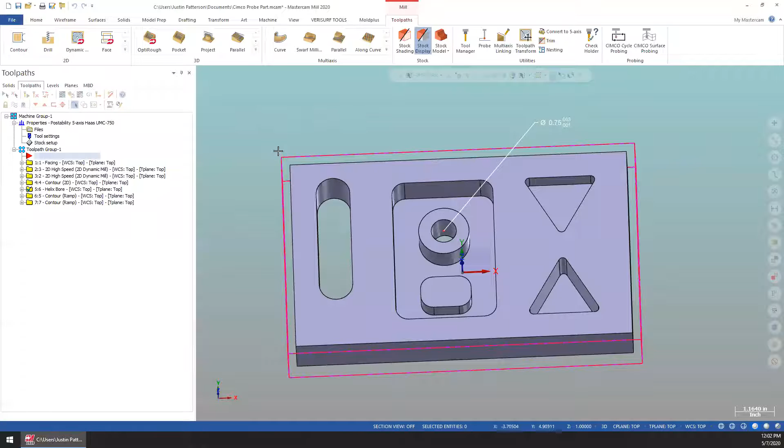It's just a simple part. It's actually out of our 2D training. I just figured this would be something good. I've thrown just a couple toolpaths on it to get us to where we can work on the if-then statements. But the first thing we want to do is, this is running on, let's say, a Haas UMC 750. We want to make sure that the part is square to the world, meaning C-axis and B-axis in this case. So all the probing just runs through these two.

I'm not going to be going over the surface probing. That will be a separate webinar. Also in the future, we're going to work on a webinar based on probing on the lathe, but right now we're just focusing on standard probing cycles for a mill. These can be added to whatever tool tab you want, so it's not required to be here in the mill. You can put it wherever you want.

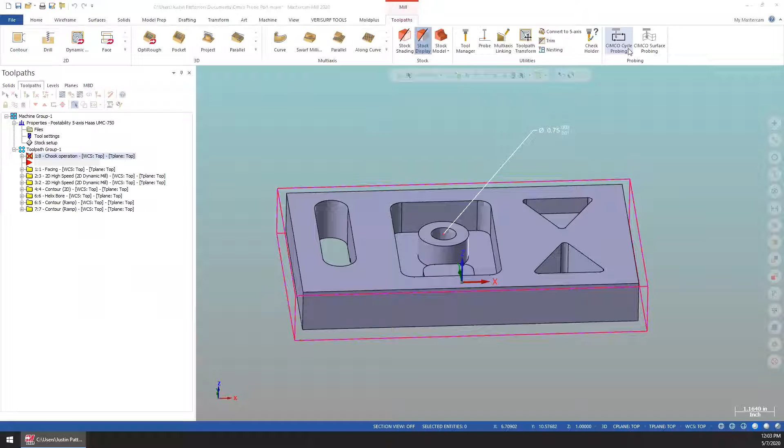Inside of here, we have our 3 different categories. We have workpiece alignment, workpiece datum, and workpiece inspection. So for our alignment, let's say we want to clock C-axis. Make sure C-axis is clocked correctly. Okay, so I'm going to go into the workpiece angle, and it takes a second for it to load up. It is doing a C-hook in the background, but it will load.

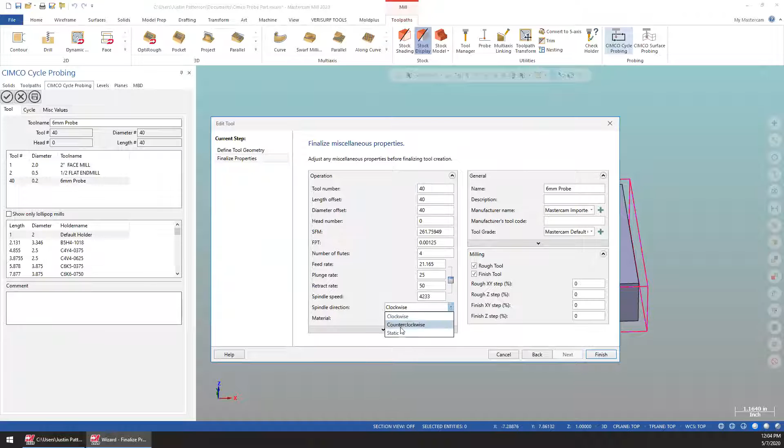I've already created a probe. All you need on a probe is just for it to be a lollipop tool. That's it. I just made this a 6mm probe. And the other thing we want to make sure is that it's a static probe, meaning it will not turn the spindle on, okay? So from there, we go into our actual cycle. This is where we add our geometry.

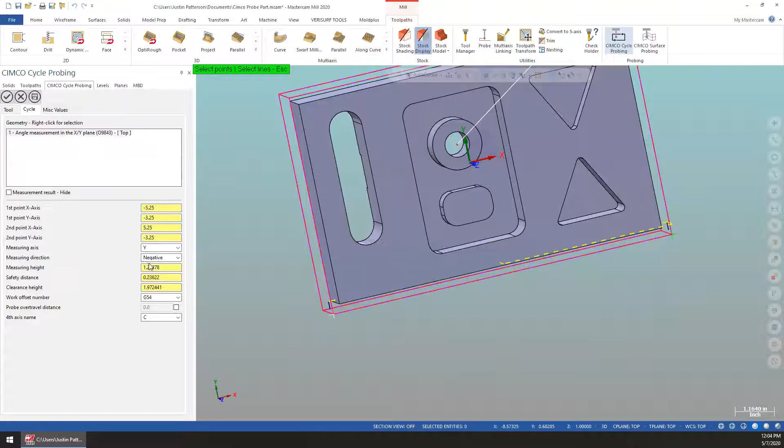If I right-click in here, I can set points. For this, since I'm going to align C-axis, I just want to click 2 points on the front face. Either face will work. I'm going to select points, and select the corners of my stock, just here and here. And it automatically outputs like this. This actually flipped the wrong way, but it's simple. The measure direction is set to negative and it needs to be positive.

So where the hits are represented in the yellow, everything can be changed. If you look through all of this process we're doing, you'll see all these variables can be changed. So the first point in X, do you want to move it? The first point in Y, do you want to move it? So if I simply hover my mouse and click, I can wheel to change these values.

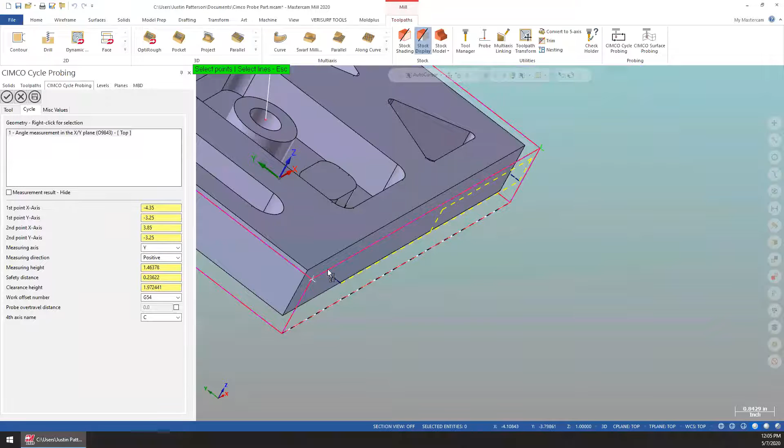So if I don't like where that X was hitting on the first hit and the second hit, I can simply wheel them in. Same thing with the measuring height, which is how deep in the part we're measuring. I can just simply wheel that. And then you have the safety distance, which is what's represented by the blue. This is going to go throughout all the processes, so I don't have to re-explain all that. I can make my safety distance larger or smaller. And then my clearance height, which is the overall height, how high do I want to go?

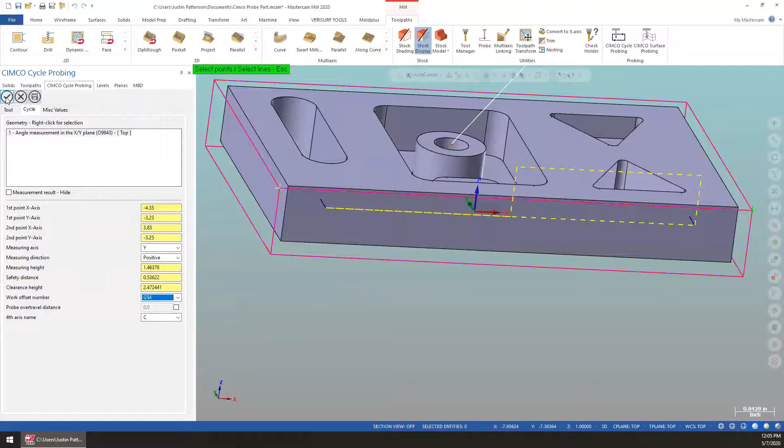So then I say, well, what offset am I going to update? Well, in this case, G54. And the axis I'm trying to update is the C-axis for the rotation. So I go ahead and hit that. It actually builds my probe routine right there. So I can replay this just like anything else. I come and take a hit. I come and take a hit.

It'll actually do the work in the background and do the work offset for C to align this part. Same thing with a B. In this case, with a UMC, this is going to be a B. We're going to go to workpiece alignment, and I'm going to do it via X-axis.

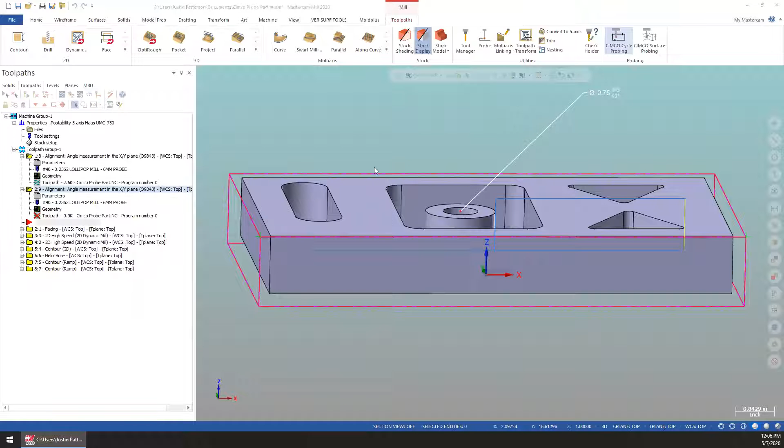I always get these backwards. If one doesn't work, try another one. That's what I always say.

So again, let it load up. I picked my probe. I go to my cycle, same thing. I'm going to select 2 points. I'm going to select the same 2 points I just used because I can move them. They're going to be in Z now because it's going to come and hit and make sure B is rotated correctly. So here I can simply, again, come in and move where I want Y to be.

Do I want Y to be more in? Do I want my X point to be in? So on and so forth. If you don't want to do this, you can go in there and physically put points through Mastercam wireframe of where you want those hits to take place. But I found it so much easier just to come in and move this around. And the axis we are going to change is going to be axis B.

Same thing. I can change the measuring height and all that stuff. Hit green check. So the nice thing about this is I've now come in here and I've aligned C axis. I've made sure B axis is correct. Now this is not always required. It's just I want you guys to know that this is something you can do. But now when it comes to actually aligning the part, I come in here and we're going to start working out of the workpiece datum section.

Okay. So the first thing we need to do is establish Z axis. I have my axis for this part, the bottom center of the stock. I've created the stock boundary already with wireframe. And I go ahead and put wireframe on the part for when we get into the inspection side of things because it needs to read wireframe.

But anyways, I'm going to go back to my workpiece datum and I'm going to go do a 1 point axis. And what I like about this is it's giving me the macros on the machine that it's pulling this from. So O9811 is the one it's going to pull on the machine. This will list all those out based on what machine you're using.

You have options. The other thing you notice, you could be pre-active or post-active with this, is what I call it. I could make these changes before because if you notice it's coming in X, I want it to come in Z. That's it. And then negative and positive obviously would just come from the opposite direction, okay? So again, this is where we're hitting. This is my safety distance and this is my clearance height. What offset am I updating? It's just that simple. That's all we need to do to update Z.

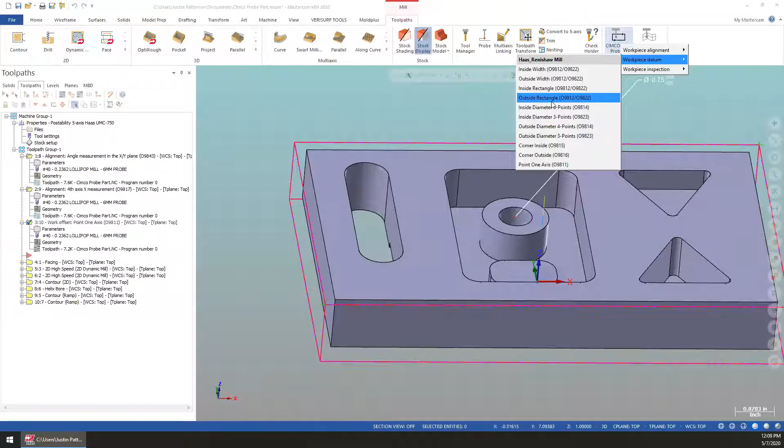And then as it comes to update X and Y, we have a couple ways we can do this. One of which is just simply doing a corner where I could go back and I could just check this corner, or we can do a full-blown rectangle. So if I come in here, I can actually say, I want to do an outside rectangle and it'll check all 4 sides. Or like I said, we could do a corner. We'll do 2 points on this corner, 2 points on this corner. 100 ways we can do this.

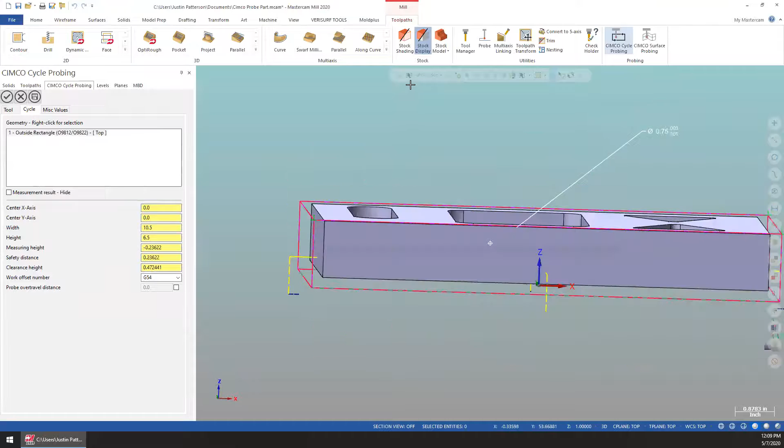So again, I can come in here. What's nice when I do a rectangle, it says, do you want me to go ahead and pull it from the stock, or I can pick lines, or I can select a chain. For this, I'm just going to have it pick the stock. Now, it didn't do a very good job at finding the depths, but it did find all the hits on the stock itself.

So again, all I need to do is come in here and wheel this up to where I want, or I can hand key in a dimension, or your right click options that we're used to in Mastercam still are there. So you could do a distance between 2 points, a Z axis, whatever you want. Safety distance, and then again, my clearance height. And here we're gonna say, what offset are we hitting?

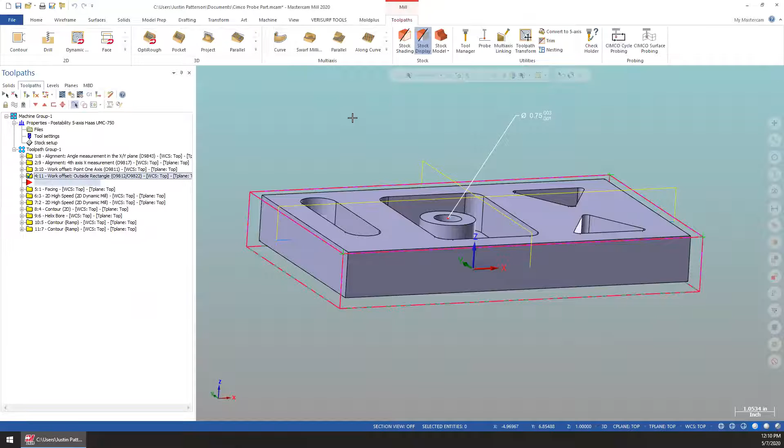Well, we're hitting that offset. So we've done that so far. I mean, you can see how quick we've thrown all this together to simply align this part. So now everything's been aligned. We're rocking and rolling. We go in here and we face the part. We do some 2D high-speed stuff.

We get to this helix bore right here. We bore this hole out, and I threw this tolerance on here just to throw it on there. Let's say it was 3/4 plus 3 minus 1. So with this, I want to go in there and I want to probe this hole to create an if-then statement to where, right after I get done boring this, go in there and probe this. Let's make sure this hole's falling within tolerance.

So when we go into that, we're going to go now into a workpiece inspection. Anything that's not aligning the part is part of the workpiece inspection section of the probing. So I have 2 options. I can do an inside diameter 4-point or an inside diameter 3-point. It's just how many hits do you want to take. Notice they pull different macros to do that. I'm just going to grab the inside diameter 3-point here. And again, let it load.

And there we go. My probe is there. And this is just a standard tool. I might as well throw this in there. You go in there, it's in your tool library. Whatever you keep your tool in your magazine, just leave it in the tool library like that and pull it in every time.

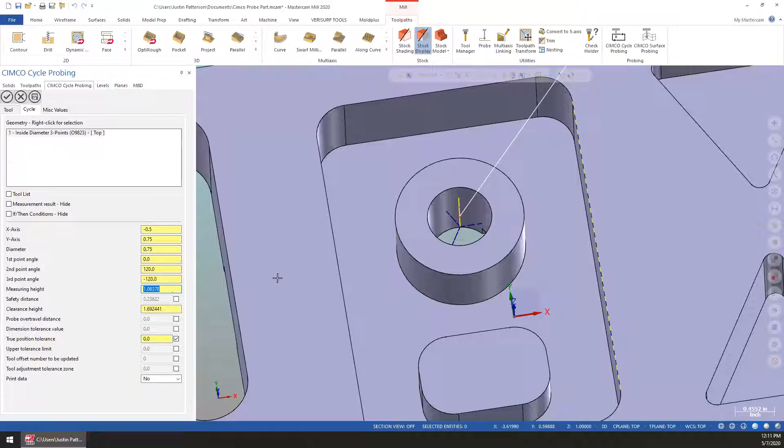So inside of here, I only have one option. I have select an arc. So simply just select your arc, and it's pretty good at building this where we want to hit at. Again, I can change the X and Y, but now it's going to change from where I have selected, so I probably don't want to mess with that. I can also change the height that I'm hitting it at if I don't want to go that deep into the hole. And we also have first, second, and third point angles, which are these. There's first, second, and third. We'll utilize that when we check this radius here, how we can change that. But normally leaving it here for checking a hole is what we want.

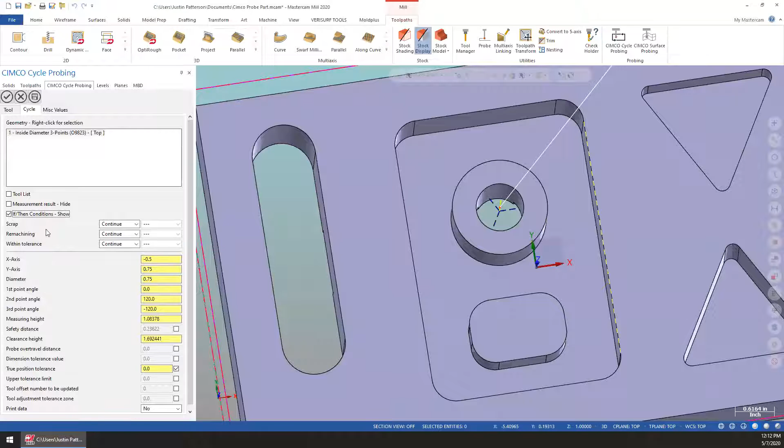So we're going to go in here and we're going to create what's called an if-then condition. So right here, I'm going to check if-then condition. So there's three possible options this hole could be. This hole could be over the allowable tolerance. It can be below the allowable tolerance, need to be remachined into tolerance, or it can be within tolerance. So I'm just going to start at the bottom with within tolerance. If it's within my 750 plus 3 minus 1, then I want you to go ahead and just continue on your merry way and go to the next toolpath, okay?

Let's go to scrap real quick. Obviously, if it's over what I tell it, what do I want you to do? I want you to go to the end of the program because there's no need for you to run anything else. I don't need to waste any more machine time if this hole's blown out. So it's just as simple as saying that.

So now let's look at the remachining side of things. We're going to tell it that if it needs remachining, I want you to go to a certain operation. So I'm going to select this because what is the operation that did this hole? Pretty much what it's asking is it's going to check it, says it's undersized, and I'm going to get to how it defines undersized. It's going to say, all right, well, it's undersized 3 thousandths, whatever. It's going to put 3 thousandths worth of comp into the tool I tell it to that drives this hole and go back to the operation I tell it to, which in this case would be operation 9.

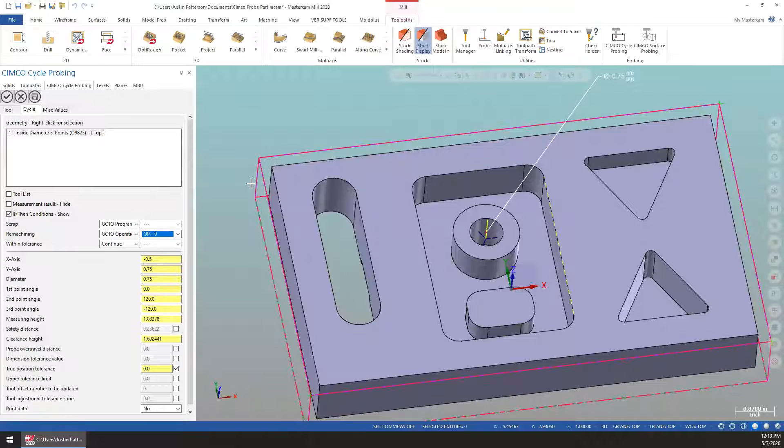Okay, so I want it to go back to operation 9 and rerun 9. So it adds the comp, bores the hole, and it's going to come right back and probe the hole again. And hopefully it should be within tolerance, so it goes out and continues on.

So how does it know what's tolerance and what's not? Well, we have to do a little bit of math for this. In an instance like this, 750 plus 3 minus 1, we've got to find the true middle nominal. So in this case it would be 751 plus or minus 2. So that's how they want to read that. They want to know what the tolerance is. And if you question this, the one we're working about is the dimensional tolerance value. If I enable this and hover my mouse over this, they're pretty good at giving this example.

So for the dimension 1.968 plus 16 minus 0, the nominal tolerance is 1.976 with an H value of 8 thousandths. So that's saying that the hole should be 751 in our case, the top of the tolerance would be 753, and the bottom of the tolerance would be 749. So anything over 753 is considered scrap.

Anything below 749 needs to be remachined, and they'll comp the value out to your nominal, which we're putting into our diameter right here. So it'd be 751. That's what it's striving to hit, that exact nominal. So all I do is put in that nominal value that I had to figure from here, and then my dimensional tolerance, which in this case would be 2 thousandths.

The only other thing we need to do is tell it what tool we want to update. So the tool offset number to be updated in this case would be number 2, because that's what my end mill is. That's literally all we do. So if it's scrap, go to the end of the program. If it's within tolerance, continue. If it's not, add the appropriate amount of comp to the tool, rerun operation 9, reprobe it, and continue on from there. So green check.

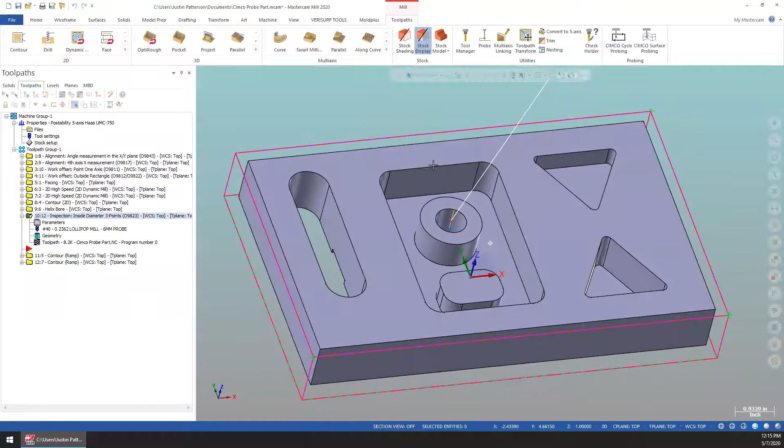So it's built it in, and I will show you when we post the code how it does the return statements. It's kind of neat. They built that all in for you. So again, all this you can replay however you want, and you can edit these operations. So once we've done all this, we have the opportunity to start inspecting parts after everything's done.

So all our options again are in our workpiece inspection. We can do an inside width, outside, so on and so forth. We can check holes. So let's go ahead and check this pocket here. That's just going to be an inside rectangle. Okay. Again, pick your probe. And here I can select lines. I could select these 4 lines, or I could simply select a chain. Just like typical Mastercam, come in and select your chain. There we go.

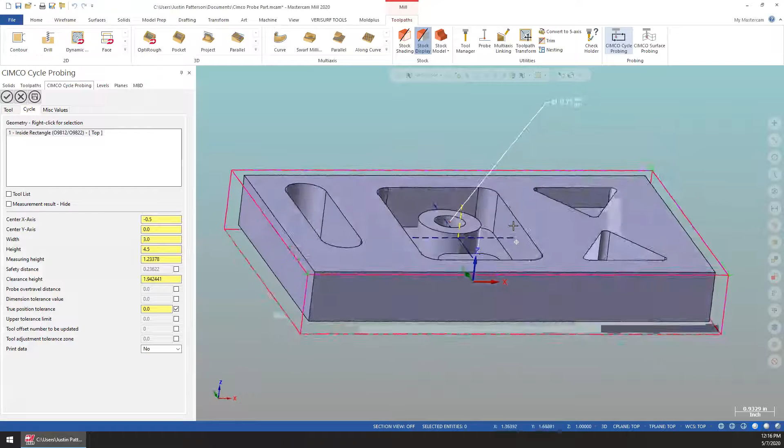So again, it does an okay job. It doesn't know that this is in the center here. It has no idea that that's there. So we need to give it a safety distance, because if we remove safety, it comes down here and hits, which is fine if these bosses did not reside in there, but they do. So I can make these a little bit less, a little bit more. I can change my clearance height. I can also change my measuring height, as we've already discussed.

So for here, I need it to show me the measurement results. The measurement results all print out to a variable on the machine. So here I can do set point C, center X axis, and so forth. You can see all these. The ones that I think are nice are actual width, actual height, or you can have it tell you the deviation in the width and the deviation in the height, so you know an actual value of how far the width is off of nominal.

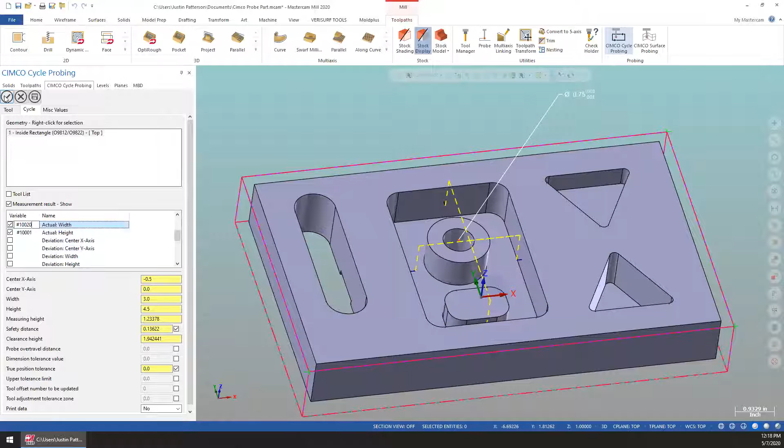So let's say in this case we wanted to post out actual width and actual height. This tells us what variables they're going in. They automatically go in 1 increments. You can input your own variable. If you have a set variable you want it to go in, let's say 10,020, you can change these to whatever variable you want. So green check that. It's just going to inspect that center pocket and output that to the variable you've defined on the machine.

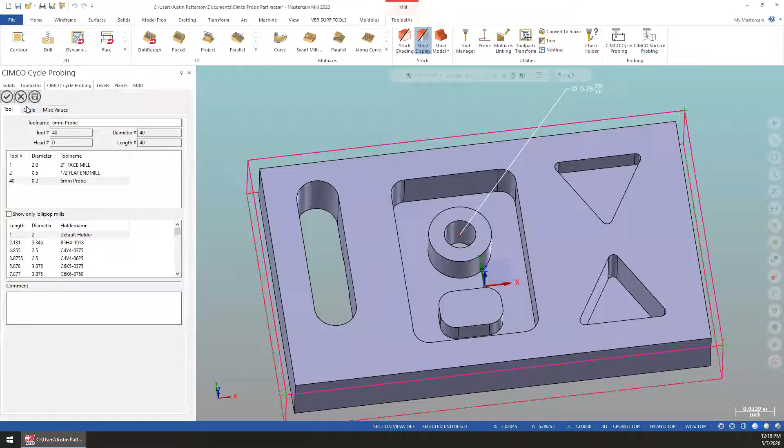So it would be the same thing if we went into the slot; we would just say an inside width. And for this case, we would just require 2 lines. Let it pull up, probe, select lines. I would simply select this line and this line, and there you go. It takes my 2 hits. And again, make the movements where you want. I can have it output my measurement, actual width, out of tolerance flag, so on and so forth. So I would green check.

There we go. So what I wanted to show you real quick is a couple more things, and then we'll open up for some questions. But let's say you wanted to check this radius here.

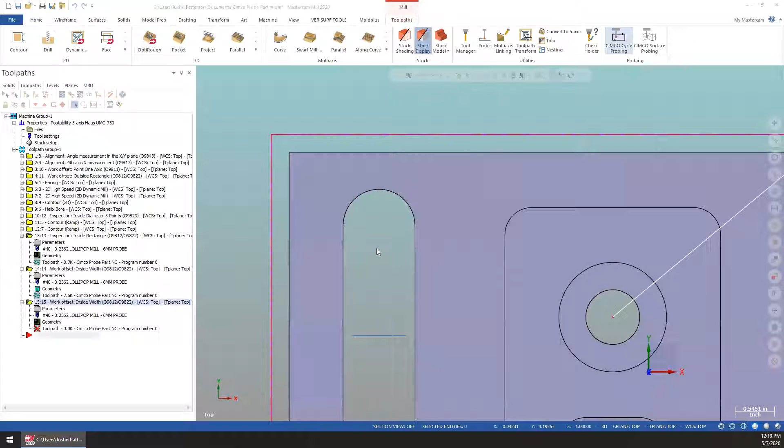Granted, if you measure this width, you got a pretty good idea what that radius is, but just for this, I'm going to show you how to do this. We can go in here and we can say an inside diameter, let's say 3 points. You can get very creative on this. So if it ever loads up, there we go. Cycle, select my arcs. I'm going to select this arc right here.

Now, if you look how it does its probe hits, remember it's this 0, 120, and a minus 120. Well, I can change those. So prime example is my first hit, I don't necessarily want it to be at 0. I want it to be maybe 20 degrees up. So again, you can wheel it, but as you can see, it's going in hundreds of thousands. So just type in 20.

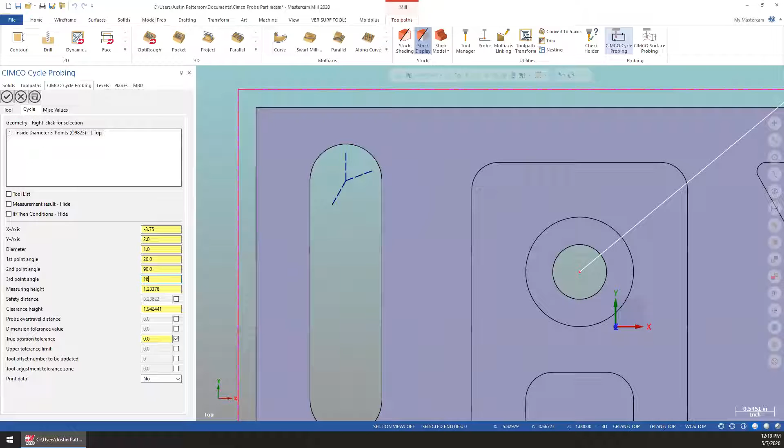There's my first. Well, then my second would be this. Instead of 120, let's make it 90. And then my third angle, instead of a minus 120, let's make it minus 160. Right there. So we can define these angles that it comes in and hits these radiuses at. So it will, again, measure result.

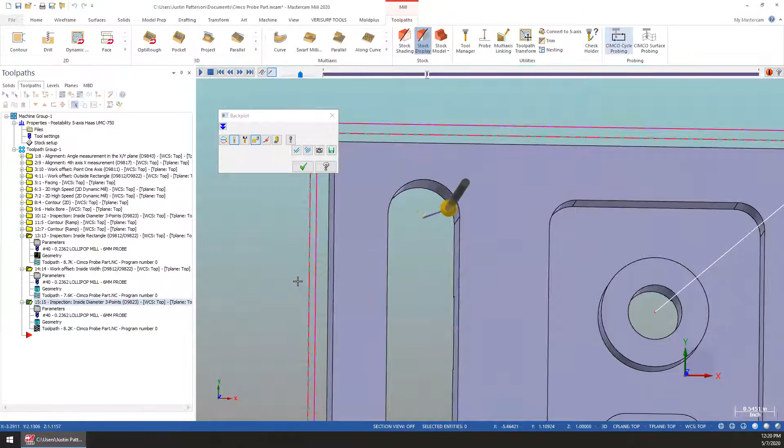The only thing is it will not output it as a radius, it will output it as a diameter. So remember that when you run to check this on the machine, it's going to be a diameter. But I can really define these probe hits really nice.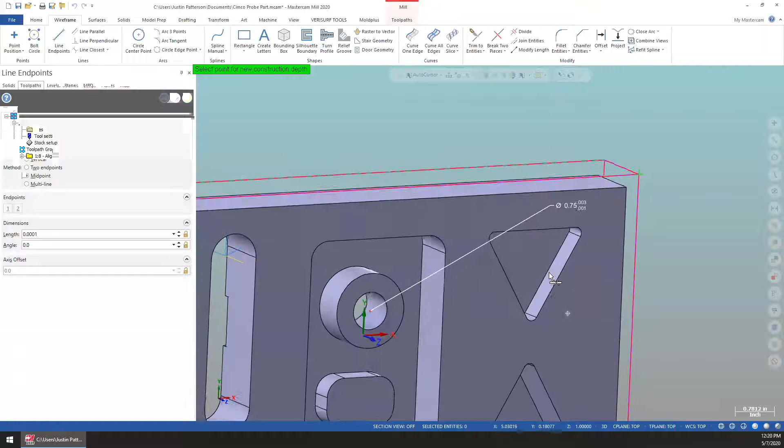One other thing I'd like to do, let's just say you need to know what the angle of this is. Well, this one you have to be a little proactive on. We need to draw a piece of geometry, a piece of wireframe on here. So I'm going to do a midpoint, and I'm going to go to this top here because I can drive everything else Z depth a little bit easier. And I'm going to come and draw a line that's just that long. Let's make it 1.25. Let's see where that puts us, somewhere around in there, okay? That puts us at that 60-degree angle because I need 2 points to set this at.

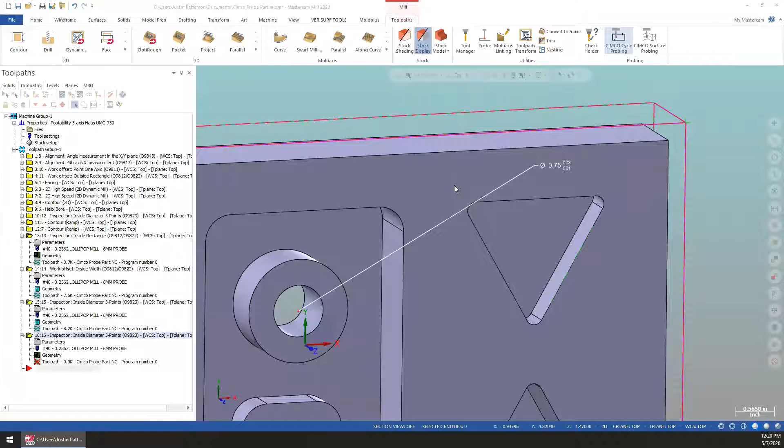So inside my toolpath, I'm going to come to workpiece inspection, and I'm going to do an angle measurement in the XY plane. It's like how we located C-axis, how we clocked C-axis. It's the same thing, but we're using it now to check an angle. So coming in here, I'm simply just going to select 2 points, this point and this point. And again, it's what side are we on, negative or positive? You just got to kind of pay attention.

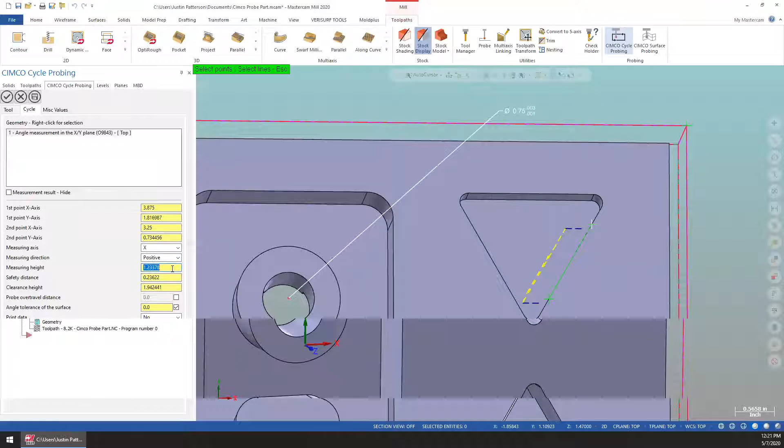Now, it does not do a straight in move. It still looks at everything in an X and Y fashion. But I can come in here and say, move this, not that one, I'm sorry, this one here, my safety distance in. And it's not nearly as a problem. So I can come in here and say, give me the actual angle of this line. And now when that probe comes in here to hit, it'll come in, make its hit, and will report that angle for that surface.

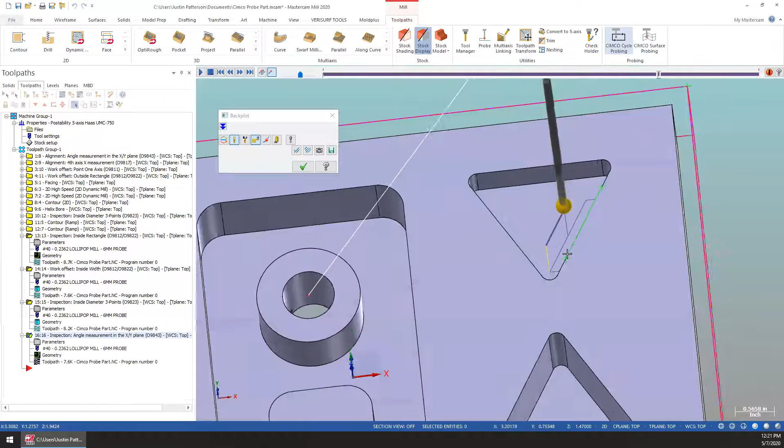So that's kind of a quick little rundown. You can kind of use your imagination of the things you can actually do. One other thing you could do is, let's say you want to know where the Z depth is of this floor. Just come in and do a 1 point, like how we set our Z axis. It's really your imagination, whatever you want this to be, okay?

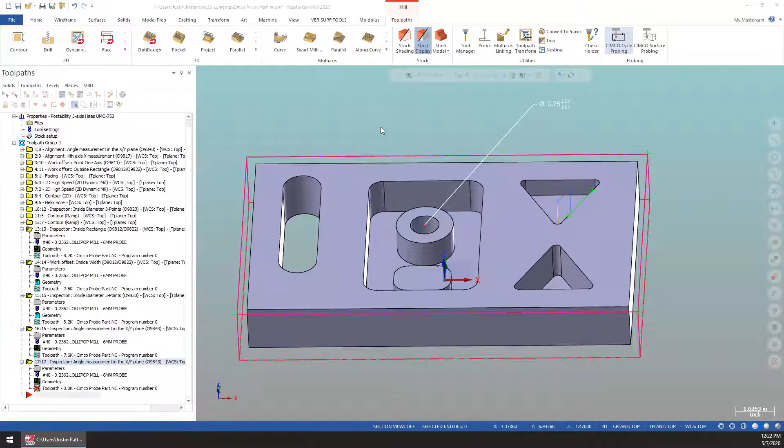Justin, what do you see as the primary uses for this? Well, personally, I think the two primary uses are the workpiece alignment and the in-process probing to make sure stuff is within tolerance. I think a lot of people are doing tighter tolerance features where we can do the if-then statements. I think that's the most powerful, but mainly I do think the workpiece alignment is the best.

Can you also do something like, let's say you're on a second op, to make sure that the proper piece was loaded? Yeah, correct. So that would be part of your if-then statement as well. You could go in there and take a hit of a feature and say that if it falls within this dimension of that feature, then go ahead and you're allowed to continue on. If it doesn't see that, then you are scrap.

And you could put anything in there. You can tell it to go to an M0 just to stop right there. That way the operator knows, anything like that. Yeah, you can use it for just that exact same thing.

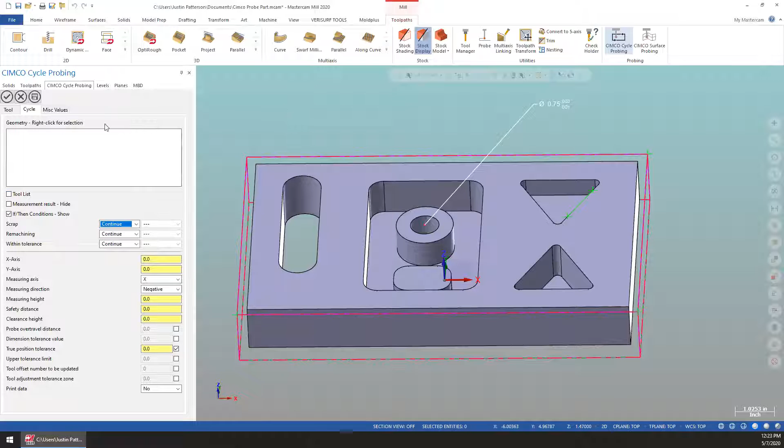But to go back to this, just your simple Z depth is I can come in here and hit a point right here. And again, I just need to tell it that it's a Z move. And I can change the Y to come out here maybe a little bit more. And then again, what's nice is I can right click and I can do the Z coordinates of a point, and I can pick a point there and it now changes that's my Z depth, pulling everything from Mastercam.

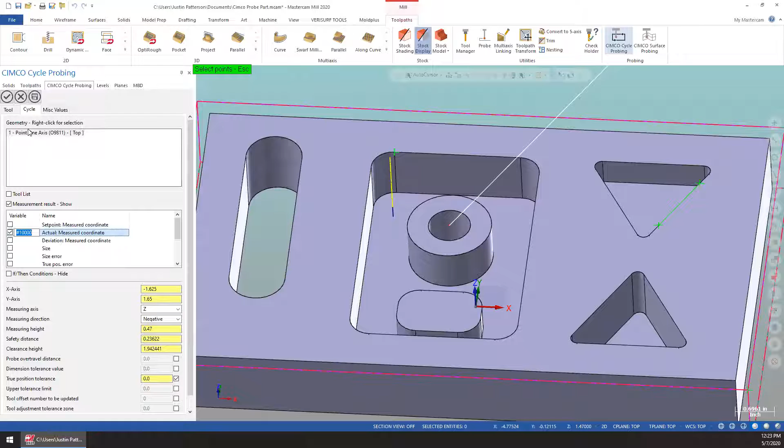So this would be the same thing. I would go in there and I could report the true position of this, the actual measured coordinates of that. So it will output an X and Y, but in this case, I just want it to be Z is what it'll output. So again, it's resetting the variables. So you kind of need to keep track of what variable number you're on. But I mean, we get paid a good salary to know these things. So we'll green check that.

So I did want to show you real quick kind of how the post will look. Again, this drives everything through the post. Yeah, so this one in particular doesn't like to have the S0, which is, you're going to get this for each one of these. When you buy this and you have your post work done on this, we'll have that changed. We actually ran into that at a customer. I hit cancel on that one, but oh well. Let's pull this over here.

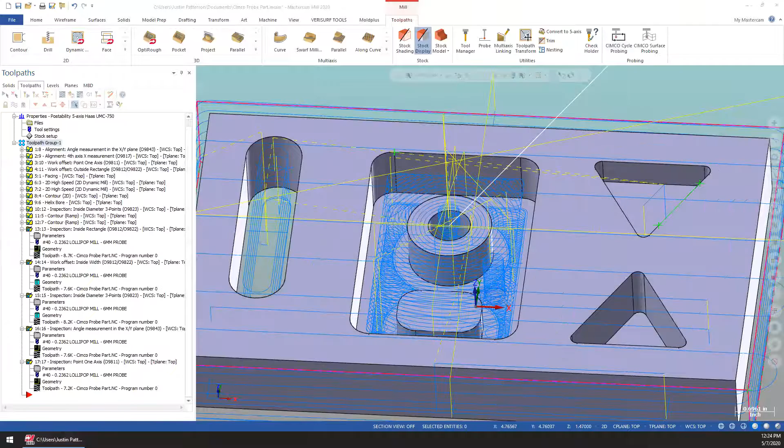So as you can see, the beginning cycles, it outputs all the probe routines throughout the process of the program. Instead of outputting everything as a sub-program at the beginning, it's in process. So as you can see, we go through here. Let me go through my tool changes. Let's look all the way down there at the bottom. Go up here to the top, click here, next tool, next tool. So you'll see when that probe comes in after this flat end mill, here it is.

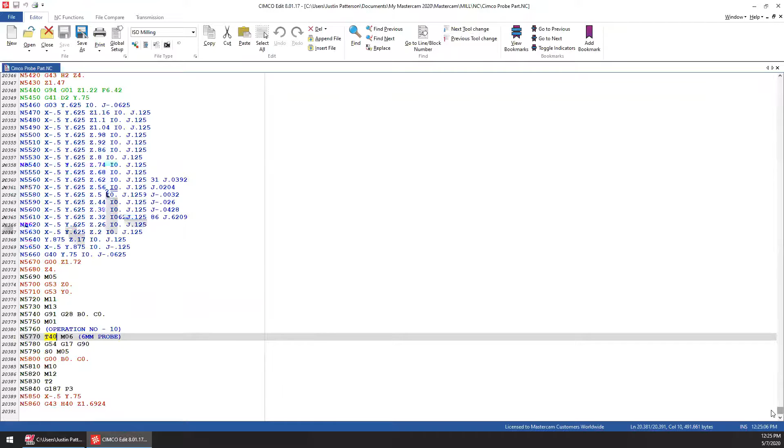This is where we, let's see, tool 2. That's when we did the hole. Well, that's the very end, isn't it? Yep, 6mm probe. Let me go back up here. Sorry, I got to find my helix bore. Tool 2. That's not posted out. I just posted out before this. That's how it always works. When you don't want something to work, it's not going to work. So I just want to show you these two here. Post these.

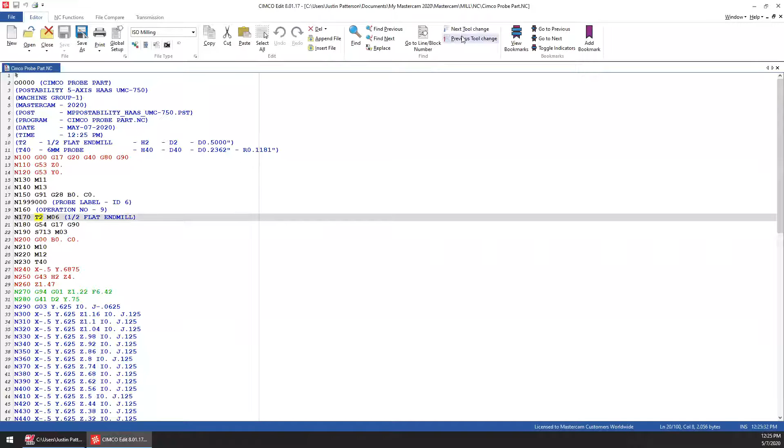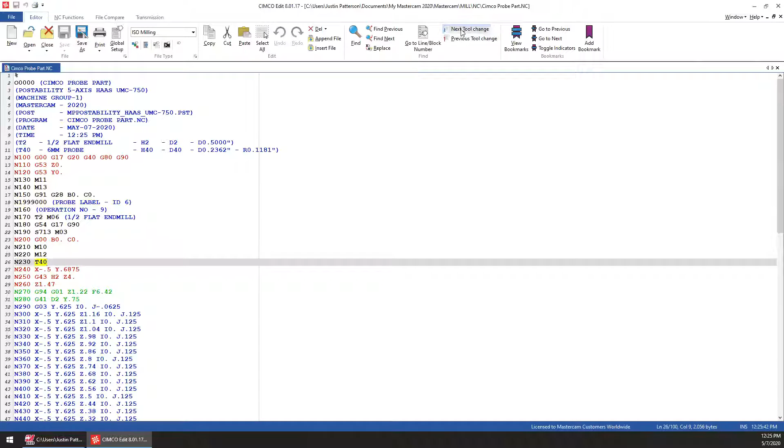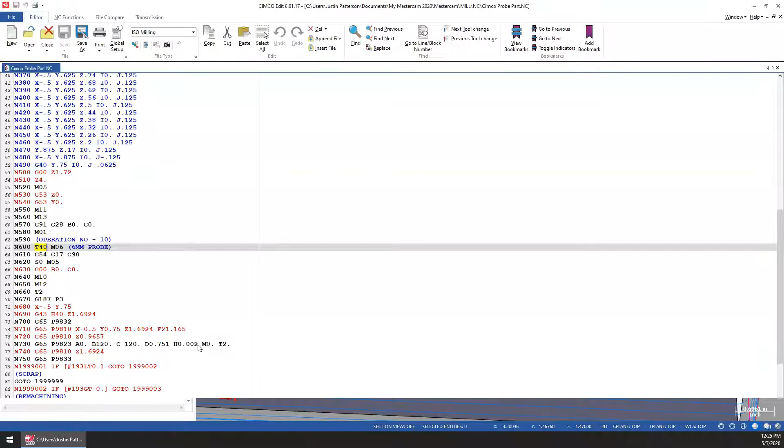Okay. Here we go. So there's your bore cycle. And then if you notice what it did is it inserts this probe label automatically, 1999000. And then you can see the probe come up here and it gives you the if then statements. It's telling you right here, see, here it is. So there's the diameter supposed to be 751 with our tolerance of 0.002. We're going to update tool 2.

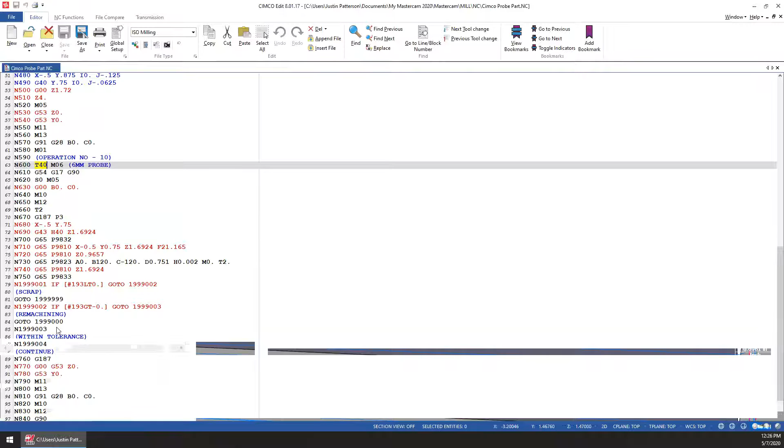So if it's scrap, go to 1999, which is at the end of the program. If it's within tolerance, go ahead and continue on. And if it's remachine, go to 19990, which is what we witnessed up here. So it builds all that into the post for you. So it makes it really nice and pretty seamless.

So I don't know if you guys have any more questions. Is there anything you need to ask? Nobody? Okay. Well, did you guys get hopefully all the information you need, kind of to show you how this would work?

The implementation, I will say on this, we've been pretty successful on several different instances to where it's not a very complicated install. It's simply just getting the post logic added to your post, and then you buy the license. Every install comes with, let me pull this down here, documentation. So what's nice is they do have tutorials built in. So if I go to the Renishaw, they give you a getting started to where you can actually walk through this.

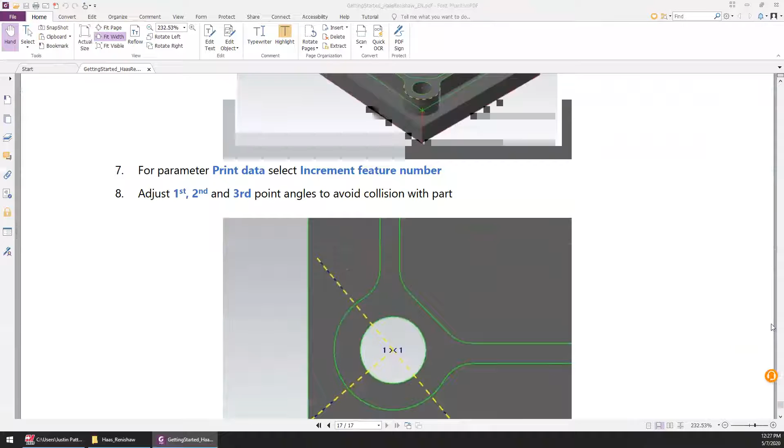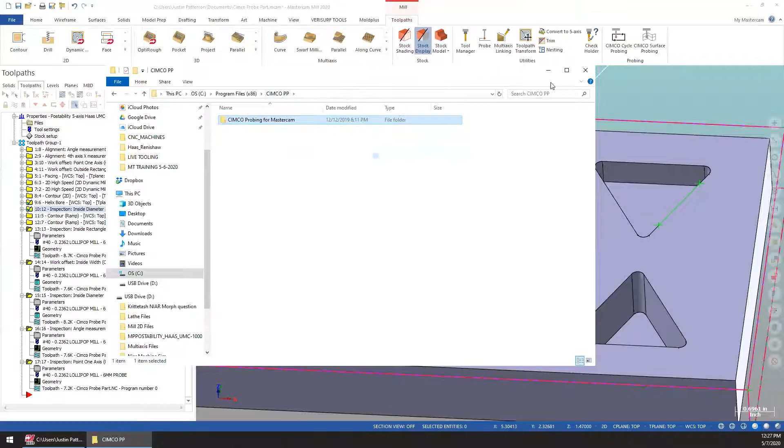It gives you, I don't know what that is. It actually walks through these same kind of processes we did, along with a sample part and a sample post. We have this for the Haas, a Fanuc, a Heidenhain, and a Siemens. It's pretty simple to figure out. Like I said, I will get into a further webinar on more surface probing. It'll actually come in and take several hits on a surface, but that'll be a future webinar.

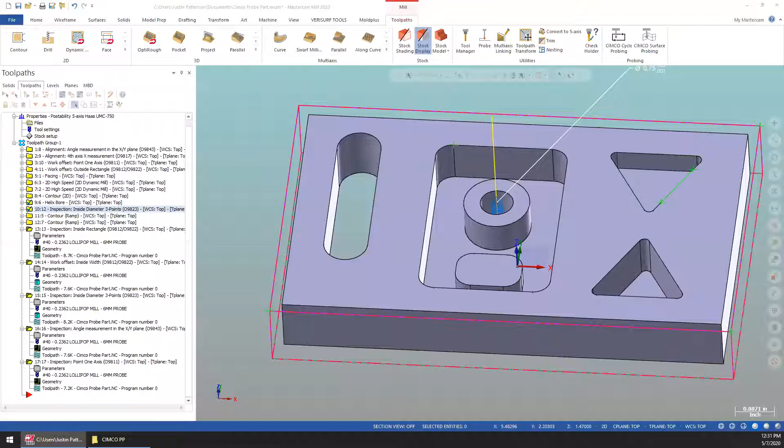I think the other thing to add in our experience is it appears in order for Renishaw Productivity Plus to function, you pretty much have to have a Renishaw tech on site to set everything up on the machine and the macros to get everything working. Because we've had places where they would put something on and the controller didn't match, then the Renishaw and RenMF file didn't match, and with this we've had great luck because of the way it handles the macros. Correct.

Anybody got any other questions? Will this operate in Mastercam for SolidWorks? Will Mastercam for SolidWorks run C-hooks? That's a great question. I might need to look into that. I don't believe so, because essentially Mastercam for SolidWorks is a C-hook. So it'd be a C-hook in a C-hook, and I don't think it's possible to have a C-hook into a C-hook. There you go. Okay. Sorry about that.

Good question. I'll pass that on to the CIMCO team. For those of you that don't know, CIMCO are actually a Mastercam reseller. Jeff, where are they out of? Denmark, I'm pretty sure. They're the same people that give you the editor that comes with Mastercam. So they are an actual Mastercam reseller. They make some really nice products.

The good thing is they've got a pretty good support team. I can ask Dennis, who I've been dealing with at CIMCO, about that, and see if it's something that could be looked at in the future, possibly getting it added to Mastercam for SolidWorks, just to bring it to his attention.